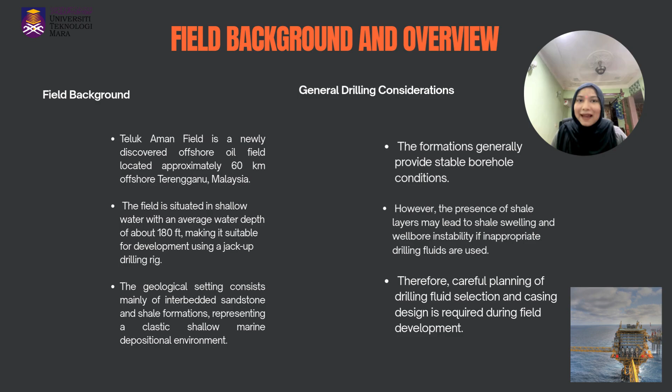Then the geological setting consists mainly of interbedded sandstone and shale formation, representing a clastic shallow marine depositional environment. Moreover, based on the general drilling consideration, the formation generally provides a stable borehole condition. However, the presence of shale layers may lead to shale swelling and wellbore instability if inappropriate drilling fluids are used. Therefore, careful planning of drilling fluid selection and casing design is required during this field development.

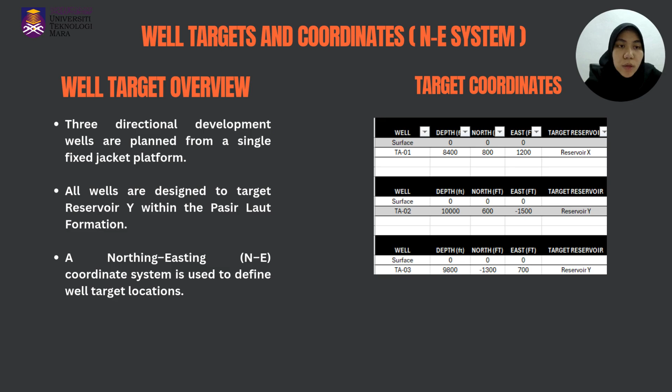2023491684. Alright, for this slide, we present the well target and coordinates using the northing-easting system. Basically, we plan three directional development wells from one fixed jacket platform. So all wells are designed to reach the target reservoir in the Pasir Laut Formation. On the right side, the table shows the target coordinates for each well, including the total depth, northing and easting values. This coordinate system helps us define the horizontal displacement of each well from the platform, so we can plan the well trajectory accurately and ensure each well reaches the correct reservoir target.

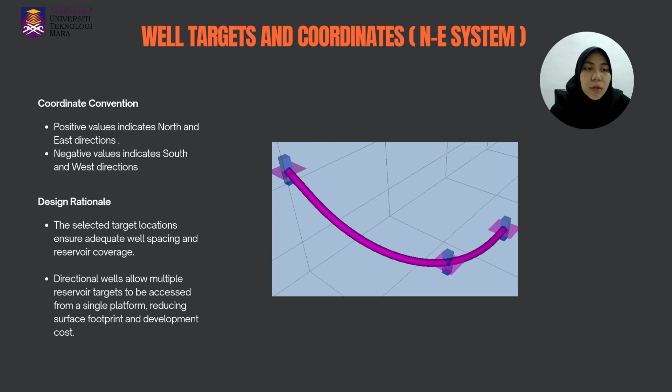So this slide explains the coordinate convention and the design rationale. In this northing-easting system, positive values represent the north and east directions, while negative values indicate south and west directions. From the 3D view shown here, we can see the wells are deviated in different directions to reach different targets. This design is important because it improves well spacing and reservoir coverage. At the same time, drilling multiple wells from one platform reduces the surface footprint and also lowers the overall development cost. So we're moving on to the spider plot.

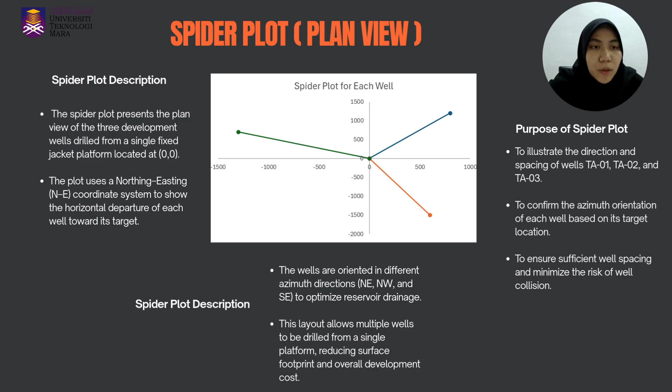So this is the plan view of the three wells drilled from the same platform located at the origin, which is 0,0. The plot uses the northing-easting coordinate system to show the direction and horizontal departure of each well. The main purpose of this spider plot is to confirm that wells TA01 to TA03 are oriented in different azimuth directions. So the wells are properly spaced, and this helps us reduce the risk of well collision and ensure better reservoir drainage across the field.

So for the well trajectory design, we apply a build and hold profile, also known as a J-type trajectory. The well starts vertically and then begins building angle after the kick-off point or KOP. After that, the well holds a constant inclination until it reaches the target reservoir. This type of trajectory is selected because it is efficient and stable with smoother curvature and lower dogleg severity. It also helps reduce drilling risk and makes casing running and cementing operations easier.

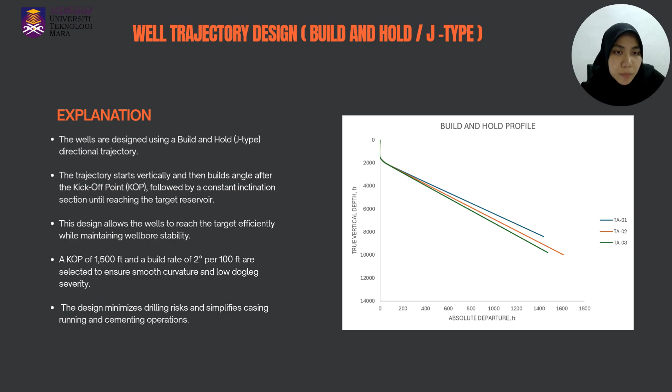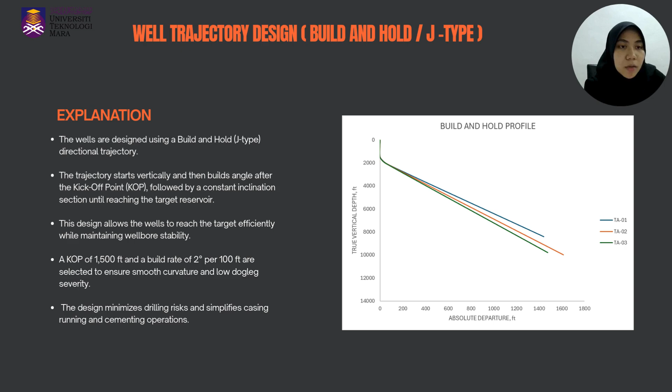So from the plot on the right, we can see the trajectory profile for wells TA01, TA02, and also TA03, where each well reaches a different target departure while maintaining a controlled and consistent path.

So let's move on to the next slide, the casing program based on casing size and hole section. So in the Teluk Aman drilling program, we apply four casing strings to ensure wellbore integrity and safe drilling. So the casings chosen are conductor casing, surface casing, intermediate casing, and production casing. As you can see, the hole size versus casing size is at your right.

So we choose surface casing. For surface casing, the hole size is 17.5 inch and the casing size is 13.375. So in this selection, we consider it because it isolates shallow weak formations and protects the shallow zone. Moreover, it reduces the risk of shallow hole instability during drilling.

Next, we move on to the intermediate casing. The hole size that our group chose is 12.25, and the casing size is 9.625. So in this intermediate casing, we consider it because it covers the mid section where the PPFG, pore pressure fracture gradient, margin becomes narrow, and moreover, it helps to improve wellbore stability and reduce kick and loss risk.

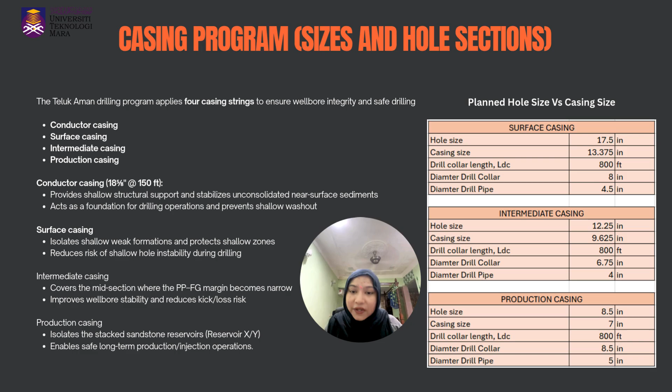As you can see, the conductor casing that we chose is 18 5/8 at depth 150 feet. We chose that size because the conductor casing provides shallow structural support and stabilizes unconsolidated near-surface sediment. It acts as a foundation for drilling operations and prevents shallow washout.

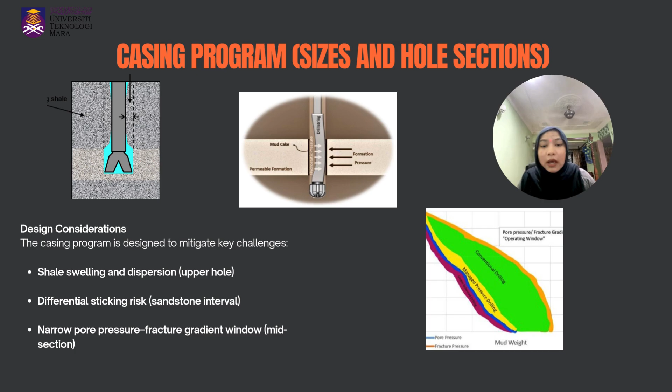So next, let's continue to the casing program based on the size and hole section. The casing program is designed to mitigate key challenges. First is shale swelling and dispersion at the upper hole. Next, differential sticking risk at sandstone intervals, and moreover the narrow pore pressure fracture gradient window at the mid section.

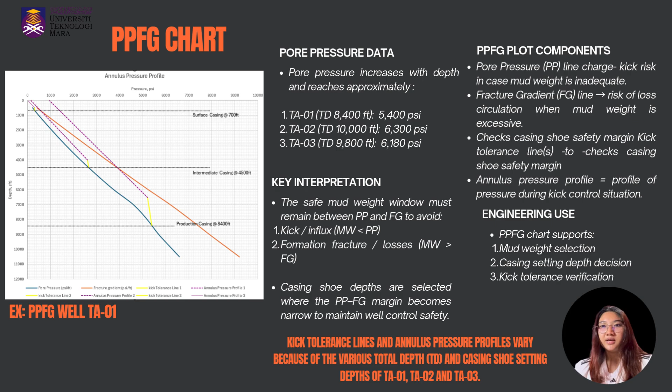The vertical and horizontal dashed lines on the chart represent our casing setting depths and kick tolerance checks. We have placed the surface casing at 700 feet and intermediate casing at 4,500 feet. These depths were chosen specifically where the PPFG margin becomes the narrowest. The kick tolerance line in yellow and the annulus pressure profile verify that even if a kick occurs, the pressure exerted at the casing shoe will stay below the fracture gradient line.

As for production casing, in all 3 wells, this string is run to the total depth of the well to fully line the reservoir intervals. Our selection of these specific depths is driven by 2 main operational goals. First, the surface casing shoe is designed to stabilize the shallow, unconsolidated formations. By setting it at these depths, we minimize the risk of wellbore washout and provide a solid foundation for the blowout preventer.

Second, the intermediate casing shoe is our primary defense against pressure fluctuations. As we saw in the PPFG chart, the margin between pore pressure and fracture gradient begins to narrow significantly in the midsections. We have intentionally placed the intermediate shoe just in advance of this narrowing to mitigate the risk of taking a kick or suffering circulation losses.

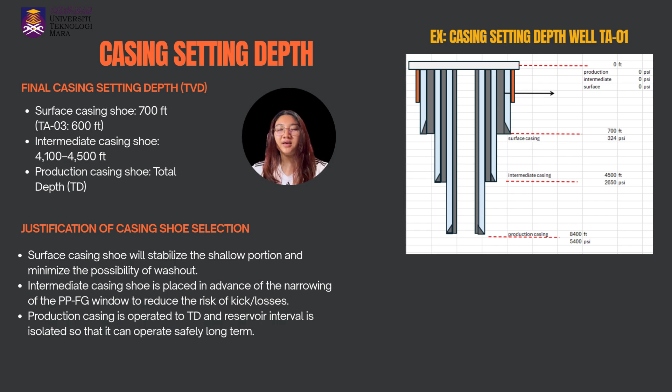The production casing is run to the bottom of the hole, reaching 8,400 feet for TA01 and up to 10,000 feet for TA02. This string is critical because it isolates the targeted Pasir Laut sandstone reservoir. By lining the entire interval, we ensure that the stacked reservoir, reservoir X and Y, can be operated safely and over the long term without the risk of cross-flow or formation collapse.

This graph presents the annulus pressure profile for well TA01 during a kick scenario control. Depth is shown on the vertical axis in feet and pressure on the horizontal axis in PSI. The blue line indicates the pore pressure, the natural pressure within the formation, while the red line represents the fracture gradient, the pressure at which the formation will fracture. The region between the two lines defines the safe drilling window.

The dashed kick tolerance line illustrates the annulus pressure when circulating out a 50 barrel gas kick. Importantly, this line remains safely below the fracture gradient at the casing shoe depth, around 4,500 feet, confirming that the intermediate casing shoe is set in a formation strong enough to withstand a kick without inducing lost circulation.

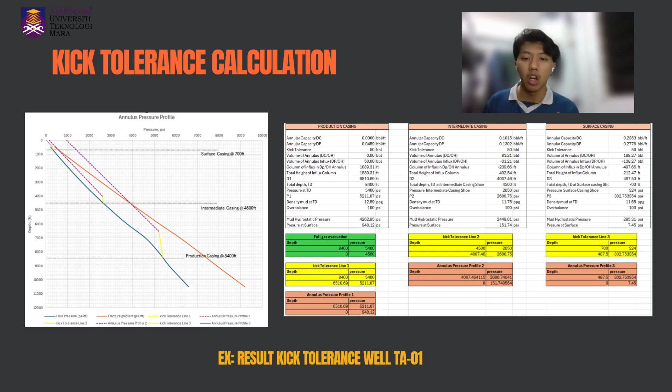Kick tolerance analysis addresses a vital safety question. Can the well withstand a kick without fracturing the formation at the casing shoe? Based on our calculation, the assumptions are a kick volume of 50 barrels, an overbalance of 100 psi and a gas gradient of 0.1 psi per foot. The outputs from our analysis provided the kick tolerance lines plotted on the PPFG chart, the annulus profiles during kick circulation and the surface pressure after kick evacuation.

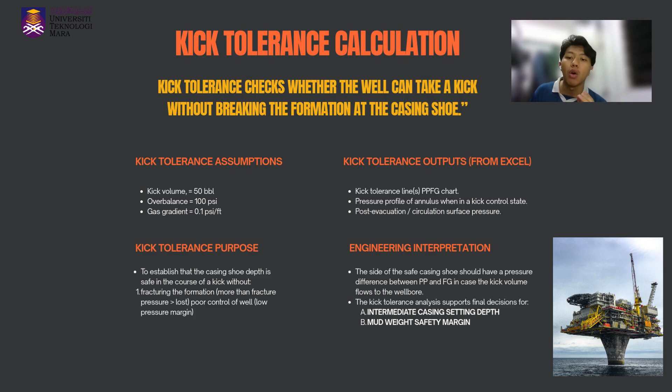So, the engineering objective is to verify that during a kick event, the pressure at the casing shoe does not exceed the fracture gradient, thereby maintaining well control and preventing lost circulation. Also, this analysis directly informed and validated our decisions regarding the intermediate casing setting depth and the mud weight safety margin.

Finally, we conducted a casing strength check to verify structural integrity against collapse, burst, and tensile loads during drilling and well-control operations. For the surface casing, the calculated collapse loads were approximately 167 psi, which is well below the collapse rating of grades like J55 or H40. The burst loads were around 1,720 psi, also safely within the burst rating of approximately 3,000 psi. All three wells TA01, TA02, and TA03 passed the collapse and burst checks for the surface casing.

For the intermediate casing, collapse loads range from 2,450 to 2,366 psi, and the burst loads were between 2,236 and 3,070 psi. Even under this high pressure, stronger casing grades such as L80 and N80 provided a sufficient safety margin, and all wells passed.

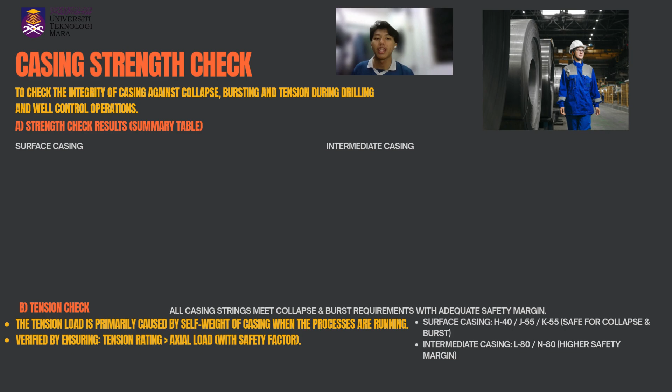Tension checks were also satisfied, as the casing tensile rating exceeds its self-weight load when the appropriate safety factor is applied. In summary, the surface casing utilizes grades like H40, J55, or K55, which are safe for the expected loads, while the intermediate casing employs higher strength grades like L80 or N80 to handle greater depths and pressures. All the casing strengths meet the required safety standard with adequate margin.

This section covers the cementing program and TOC estimation for the Teluk Aman field development. The primary purposes of cementing are to achieve zonal isolation and prevent fluid movement behind the casing, to support the casing strength and enhance well stability, and to ensure safety during drilling and the long-term functionality of the well.

For our surface casing, we are using a slurry design based on Class A cement with a 6% bentonite additive. The design slurry density is 13.49 pounds per gallon with an excess factor of 1.3. The total job will require approximately 337 sacks of cement and over 3,000 gallons of mixing water. For the intermediate casing, we step up to Class G cement, again with 6% bentonite. This slurry is slightly denser at 13.63 pounds per gallon.

For this section, we estimate needing about 328 sacks of cement and just under 3,000 gallons of water. These designs are tailored to the specific pressures and formation of Teluk Aman field, which consists of interbedded sandstones and shales. The goal is to ensure a complete, competent cement sheath that provides permanent zonal isolation across our target reservoirs in the Pasir formation, safeguarding the well's integrity for its entire life cycle.

Next, we'll compare two casing design strategies for the Teluk Aman wells, focusing on well control risk and economics. We are analyzing the intermediate casing designs for well TA01 and the deeper well TA03. The key difference is driven by depth. Well TA03, being significantly deeper, encounters higher formation pore pressure. This directly translates to a greater demand on the casing's ability to withstand internal pressure, or its burst rating.

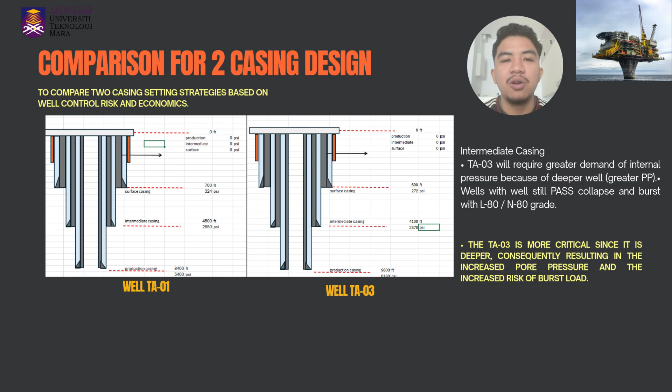Let's examine the mechanical load analysis for well TA03 compared to well TA01, focusing on both collapse and burst loads. First, looking at collapse loads, which is the external pressure trying to crush the casing. For the deeper well TA03, the collapse pressure is significantly higher due to increased overburden and formation pressure at depth. The design envelope shows that the casing must withstand higher external forces, especially at the shoe depth, compared to the shallower TA01.

Second, burst load, which is internal pressure trying to rupture the casing. Well TA03 faces a more severe challenge. The higher pore pressure at greater depth creates a much steeper burst pressure profile. The casing, especially in the surface and intermediate sections, must be rated to contain these higher internal pressures without failure.

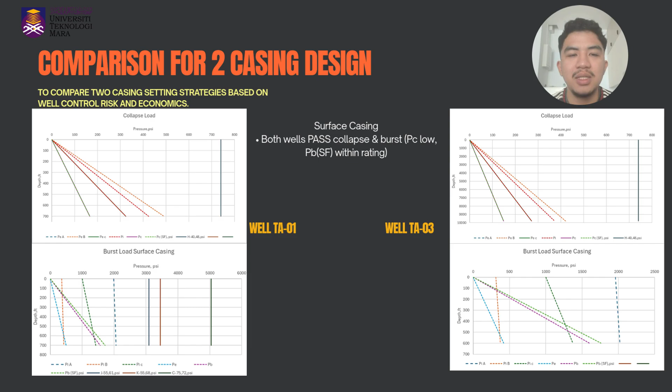While both wells are designed with safety factors in mind, TA03 operates much closer to its mechanical limits for both collapse and burst. This confirms that deeper wells require stronger, higher grade casing, more rigorous design validation, and often result in higher material and operational costs. In summary, depth drives both external and internal load risks, making TA03 the more critical design case for ensuring well integrity and cost-effective construction.

To conclude our technical proposal, we present a final recommendation for the Teluk Aman Phase 1 drilling campaign. This section synthesizes our casing design and setting depth strategy into a single executable program. Based on our analysis of the clastic sequences and pressure regimes, we have selected 4-string casing. For the conductor string, a 24-inch hole will be drilled to set the 18 and 5/8-inch casing at 150 feet. Surface string, a 17.5-inch hole for a 13 and 3/8-inch casing. Intermediate string, a 12.25-inch hole for a 9 and 5/8-inch casing. Production string, an 8.5-inch hole will be drilled to run a 7-inch casing to the total depth.

Our shoe depths are tailored to the specific target depth of each well to ensure maximum mechanical integrity. For TA01, a surface casing at 700 feet and intermediate at 4,500 feet, reaching a total depth of 8,400 feet. For TA02, the surface casing is set at 700 feet and intermediate at 4,200 feet, reaching our deepest total depth of 10,000 feet. As for TA03, a slightly shallower program with surface at 600 feet and intermediate at 4,100 feet, ending at 9,800 feet total depth.

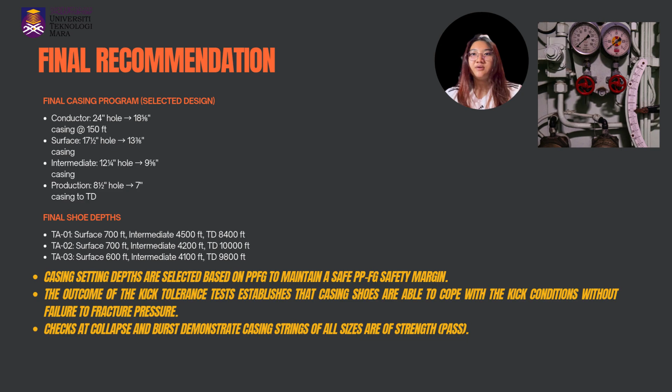Our recommendation is backed by 3 critical engineering checks that ensure the safety of this program. The PPFG margin, where all casing setting depths were selected based on our pore pressure and fracture gradient analysis to maintain a safe operational window. As for the kick tolerance, the outcome of our kick tolerance test proves that these casing shoes can successfully cope with anticipated kick conditions without reaching the formation fracture pressure. And finally, for the structural integrity, comprehensive checks for collapse and burst pressure demonstrate that all casing strings across all sizes meet the required strength standards for the expected bottom hole pressure of up to 6,600 psi.